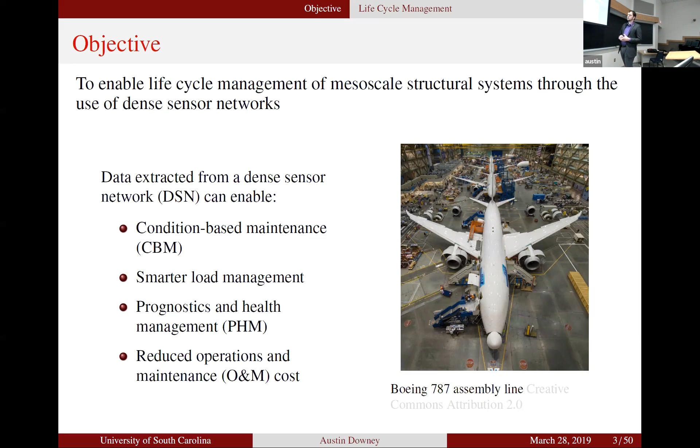This can enable condition-based maintenance, smarter load management, so we can take our structures and use them how would be best suited for the structure's health, prognostics and health management, but most importantly, reduced operations and maintenance costs. A lot of this is being pitched towards the view of owners and operators of structures, and if we're not able to reduce their operations and maintenance costs, then there's really no interest in this.

So with all that in mind, what do we need in an ideal dense sensor network? First and foremost, it needs to be cost effective. We cannot take a structure like the Charley Western Bridge here in Northeast Iowa and try to sell them a $1 million monitoring scheme. So these need to be cost effective for the situations we're looking at.

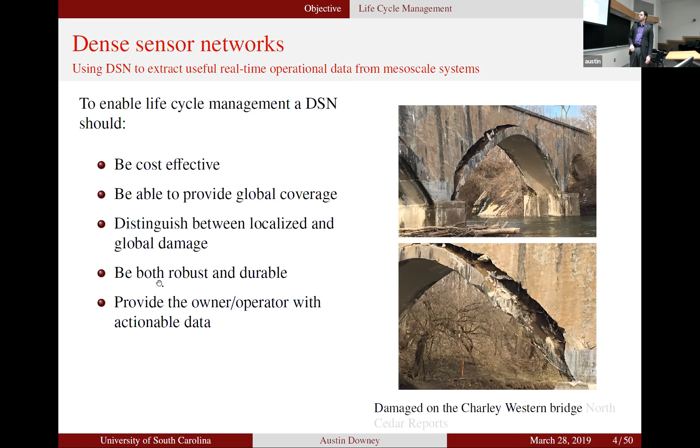It needs to be able to provide global coverage, but also needs to be able to distinguish localized from global damage. It needs to be both robust and durable in terms of how long the sensor can last and what kind of operations it can last through, and provide the owner operator with actionable data. Again, this bottom one is probably the most important. If we're not giving the owners and operators something to do with their data, it's not a lot of use.

So when we talk about actionable data, what does this actually mean in terms of life cycle management? If we start at the bottom left, we have a structural component and some real-time operation monitoring. This dense sensor network is what we're interested in today, shown in this top blue box. There's two sensing technologies here, but there could be millions more.

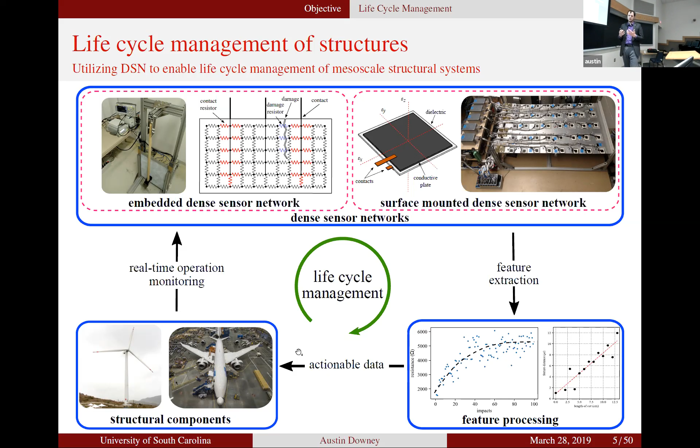Typically from dense sensor networks, we'll look at feature extraction, get us down to feature processing, some prognostics, some condition-based maintenance. But all of this has to cycle back into giving owners and operators some sort of actionable data, something they can actually use to reduce their operations and maintenance costs.

How does this fit into what we typically consider maintenance schemes? In terms of complexity on our vertical axis and benefits on the horizontal axis, we can start with breakdown maintenance in the bottom left corner - we just repair things when they're broken. The next step up is scheduled maintenance, so airplanes have components that have to be inspected every 3,000 hours or 500 hours of flight for engine components.

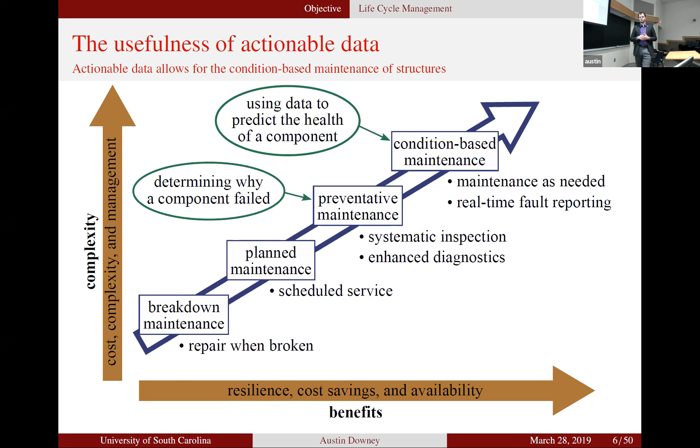Beyond that, we can start to do some preventative maintenance. This is when you start to look at NDE techniques - determining how a component failed, why it failed, trying to see if that component needs to be replaced. But what we really want to push is condition-based maintenance, and to get there we need information looking forward into the future. For this, we really need real-time fault reporting, and this is where the idea of dense sensor networks comes in.

This is the last slide I have on this need for actionable data, and I took this picture myself. This is a wind turbine blade south of Kotzebue, Alaska - that's 33 miles north of the Arctic Circle. There's damage on this blade, and we know where the damage is.

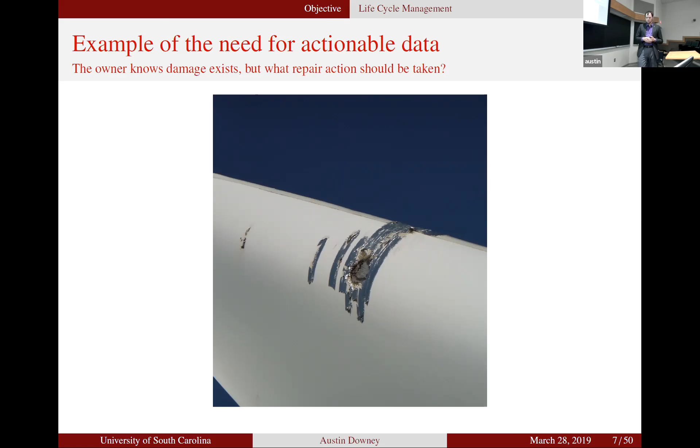Typically we're trying to look at damage location and quantification - we know relatively how big this damage is. That blade operator had repaired that damage once, and then the repair failed. What they were looking for was some sort of actionable data - someone who would come in and give them information about how this blade was going to act into the future. So what we're trying to develop are sensing technologies that can track the degradation and give us prognostics into the future.

So now that we have an idea of why it is that we're working on things, we can look at some technologies. First we'll talk about an SEC-based sensing skin.

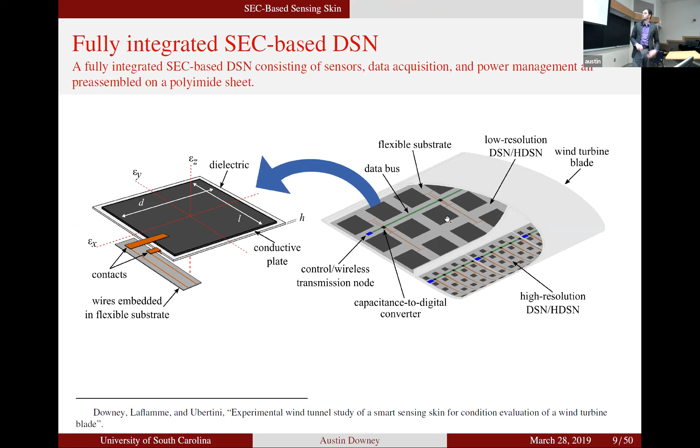This is a fully integrated sensing skin. It comprises small individual sensors that we manufacture, and our goal is to integrate these into large sheets that have all of your controls, wireless communication, power - everything integrated into a whole sheet. Our goal would be a solid polyimide sheet that you could roll up, either as an OEM application or for maintenance, pop off the end of a tube, put some epoxy on a structure, roll out one large sheet, and you're done - walk away.

So a little bit more about the actual sensor. This here is the SEC, the soft elastomeric capacitor.

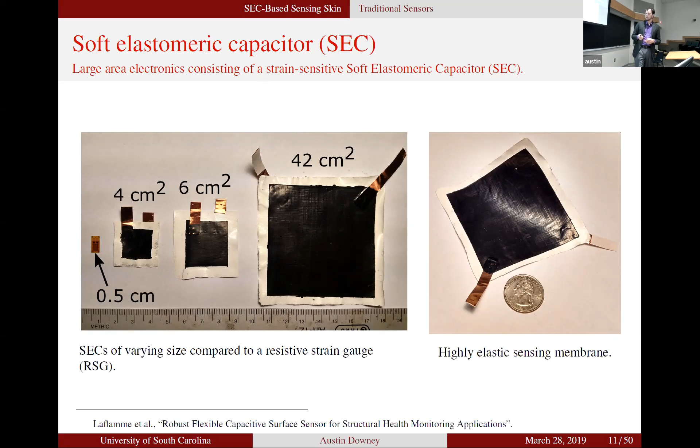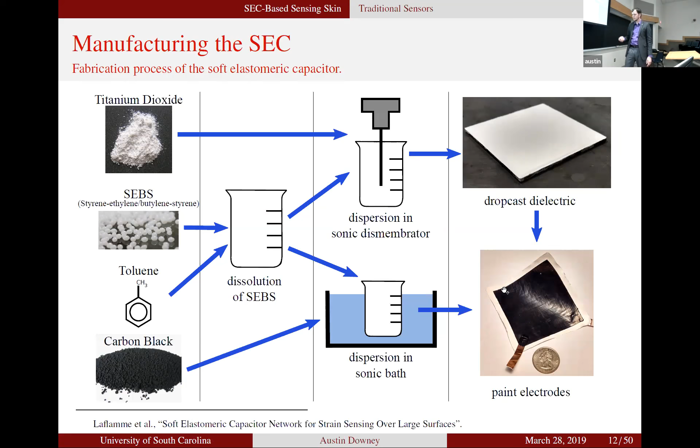These can be made in any size. They're cheap and flexible, made using simple equipment. It's just a dielectric that we drop cast, and then we paint a conductive layer on each side. That conductive layer on each side forms a capacitor with a very simple electromechanical model.

We can get a change in capacitance as a function of our relative static permittivity and the dielectric constant, multiplied by the area over the height. A change in area and a change in height when we stretch the capacitor will give us a change in capacitance. It's an additive strain, epsilon x plus epsilon y, with a gauge factor of about 2.

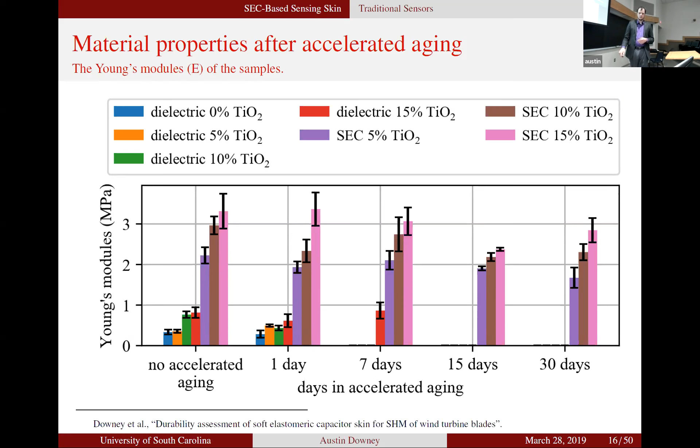And then the Young's modulus - any of the actual SECs, which are the 3 that made it all the way out to 30 days, have a very long, stable lifetime. This is helpful in giving us information on how long these are going to last in the field, so on the order of years is without an issue.

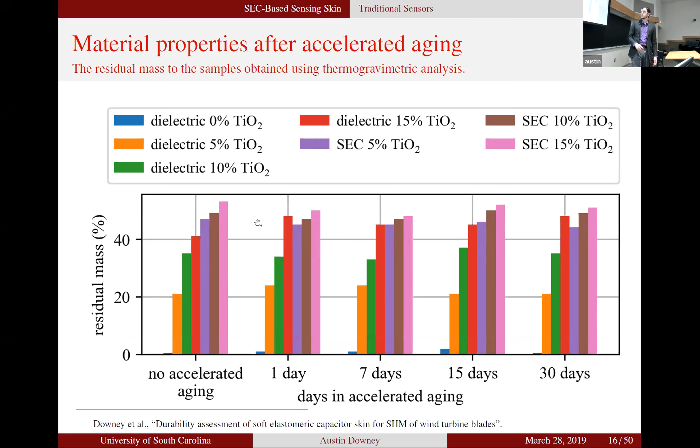Sensor works just fine for that. What if we're interested in a more complex cracking situation where we don't know where the cracks are going to form? We can solve this with the use of a dense sensor network.

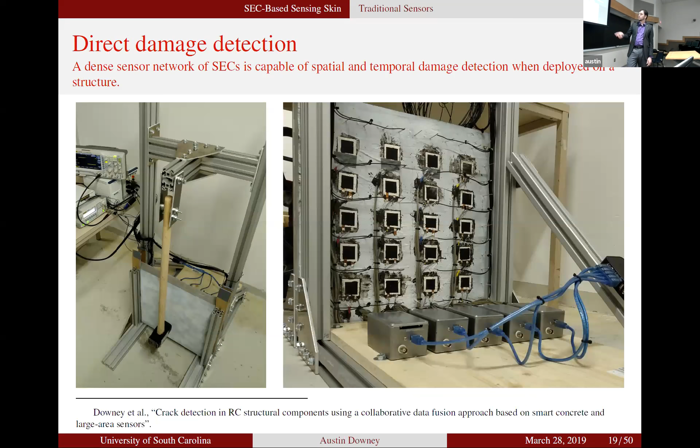This was again at the University of Perugia, on the back of a concrete plate, and we've got 20 SECs on the back. When we impact it with the hammer, which just kind of repetitively falls into the concrete plate, anytime a crack goes through an SEC, we're able to detect it quite clearly.

However, when we have cracks that form around SECs, which you can see happens quite readily here, we have more challenges. This would have to be solved through a model-based approach, looking at actual strain maps.

But the other interesting thing is we can make these SECs in any shape we want, and they're incredibly elastic. Here we have 3 SECs on a steel wire reinforced concrete beam, and you can see that as the beam opens, we get a lot of opening here. We can track all 3 displacements from 3 different SECs, 1, 2, and 3.

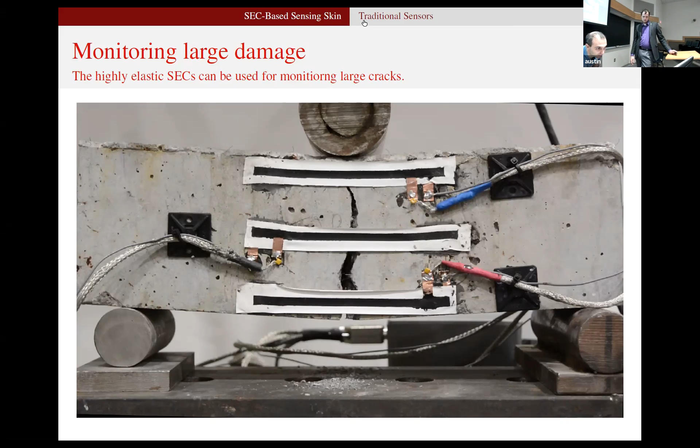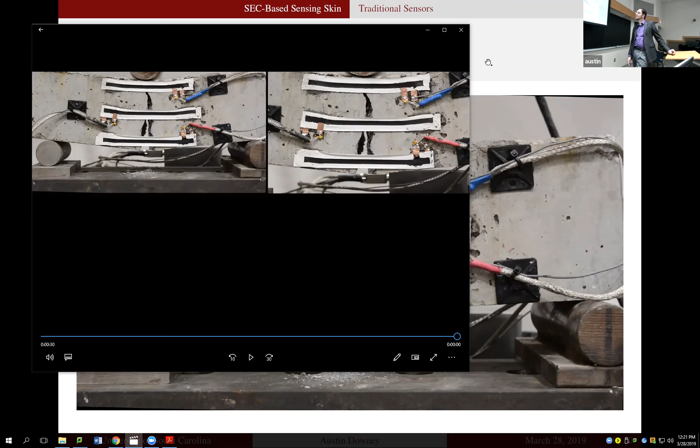Oh, you don't see it? You only see your— sorry. Oh yeah, let's do that again, sorry. Do we have to do that for every video? No, sorry, we're gonna just do your whole desktop. Well, we can watch it again. It's super exciting, nobody got to see it. It's riveting. It's okay, try it again. Okay. You see it now, Tommy? Still don't see it, I'm sorry. It's fine, stop the share. We can tilt the camera around. We should share your screen. Okay, yeah. Try it again, okay, so should I close out of it and open it? No, you're okay, is it working? I'm gonna double check, sorry.

Just continue. So if you can see the video, what you'll see is we have these 3 SECs mounted on the beam itself, and as the beam opens, we can track the opening using each one. These are highly elastic, and this gives us a flexibility that other sensors don't, because we can use this over large openings and cracks, around corners, around welds, and the flexibility allows us to install them anywhere.

So another thing that we can do that other sensors have issues with is full field strain measurements. Of course you could do this with digital image correlation, but that's hard in a monitoring situation.

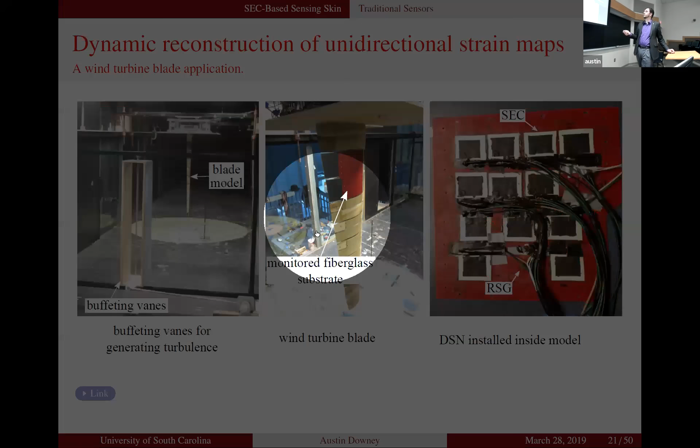At Iowa State University, we have a wind tunnel. What we did is we built a model wind turbine blade and introduced some buffeting to it. We have this fiberglass substrate on the side, and inside of that we put 12 SECs, right, much smaller SECs, but still the same thing.

Here's the wind in real time, this is the blade operating in real time. Other videos, there it goes. Here's the wind blade kind of buffeting back and forth in real time.

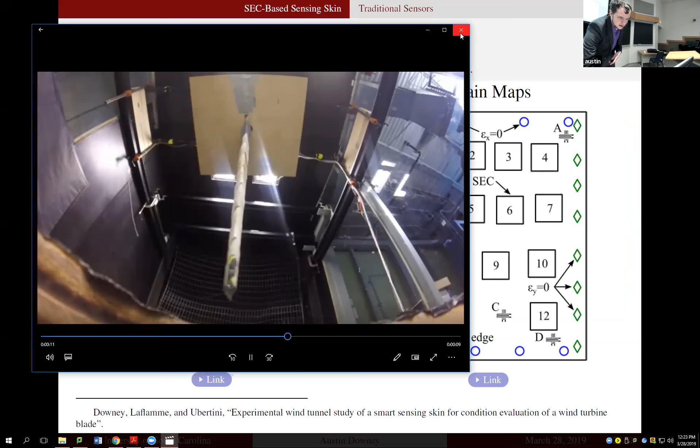Then what we can do is take our SEC measurements and rebuild dynamic strain maps. So here we are slowed down, and we have epsilon x and epsilon y. Again, we measure the additive of the two, and we use an algorithm we developed as part of my PhD to decompose them, but we haven't really discussed that here.

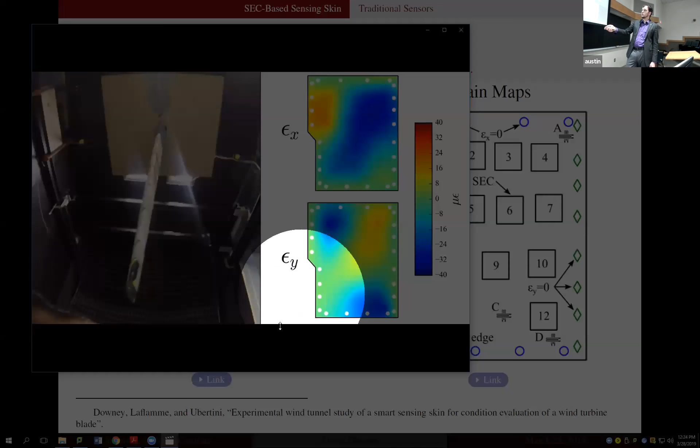What you'll notice from the x and the y is you get tension and compression right next to each other, and this shows that the turbine blade actually has a moment, a torque in it. You can see that twisting in the tip of the blade if you watch—you can see the tip of the blade twisting, and the SECs are able to pick up that torsion in the blade through a full field strain map.

So they work real well for large scale structures, for monitoring very easy to detect cracks. But again, we're interested in developing these for life cycle management. To do that, we really need to get some prognostics data. So what about the smaller cracks?

Here we're going to develop, or talk about, an algorithm we developed for incipient damage detection. Why focus on incipient damage? Direct monitoring of cracks is relatively easy—we put a few sensors down, we have a crack, it forms, we're good. Indirect monitoring of internal damage is definitely more challenging—it's undetectable through traditional threshold algorithms, since we're not just going to see a clear step in incipient damage. There are better prognostic capabilities if early stage damage is tracked, so we can understand how this damage is going to grow the sooner we track it.

Some of the things we really want to be able to do are localize damage within the sensing skin, and we want to do this without a black box algorithm. Nothing wrong with deep neural networks, but we want something physics-based that we can give to an owner or operator, saying this is how we see it, this is why we see it, and it helps them believe it. It's all about getting actionable data back to them, instead of giving them a black box and saying the machine has shown us we need to do this, and the follow-up question is always answered with, I don't know how, but it did.

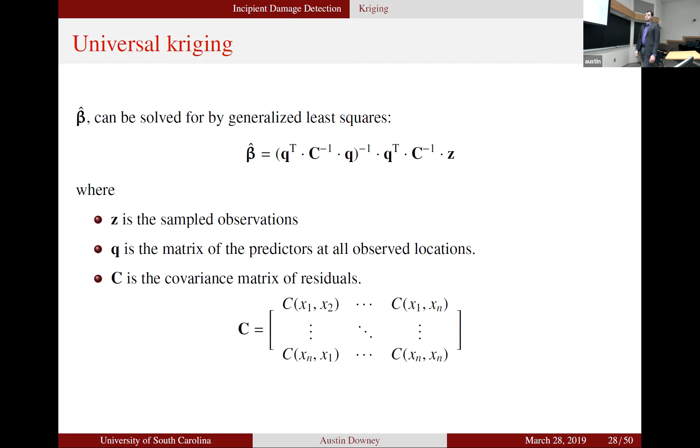So beta can be solved for using generalized least squares, but for this beta we need our C, our covariance matrix, which is a matrix of residuals. This is not a matrix that we have, it's not a matrix we can measure - it's a matrix we have to build.

To build this, we use a variogram model, and we chose a power variogram model just because it's asymptotic, easy to model, and very stable. The important thing to notice is that it's piecewise - if the distance between the data point we have and the data point we want to estimate is 0, meaning we're right on top of the data point we know, our covariance is 0.

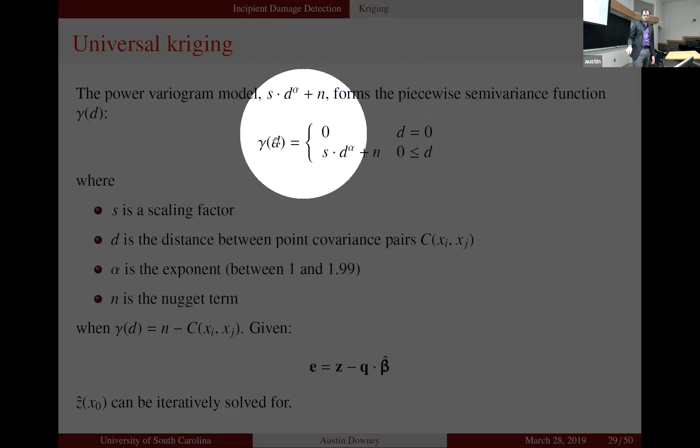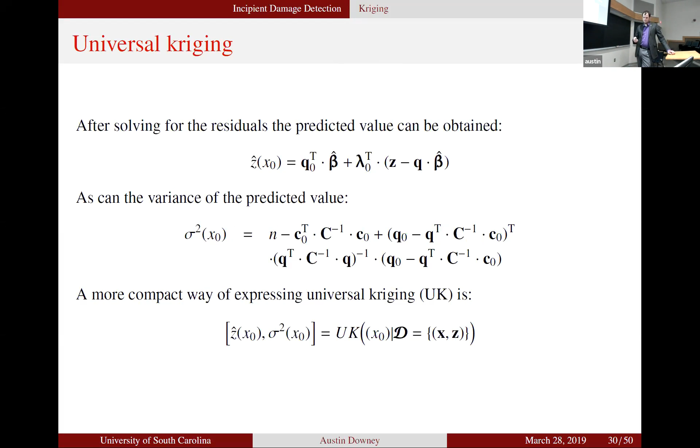And this gives us an exact solution. Anything where our distance is greater than zero, we start to use this power distribution equation. This gives us two equations now. For each value in the field, we have an estimated value at our location Z, and an error value at our location Z, or our standard deviation. We can use these in an algorithm as we move forward. It's a more compact way to write it, but it doesn't matter too much.

We need a variogram model, and so here we use the power variogram model. We also need a drift term equation, and we just use the linear drift for simplicity and ease of code.

Now we want to look at how we can start to use this algorithm to extract more information from our system. Again, we're not able to actually see the damage in terms of signal, so we have to use a statistics-based approach. For that, we're going to use a Kullback-Leibler divergence, which is the measure of dissimilarity between two probabilities. So we have a probability P and a probability Q.

We're going to take the convolution of the two, and then take the area under our convolution curves. This gives us a quantifiable dissimilarity between two probabilities. This has been used before for incipient fault detection, so it's a good place to start. It's computationally simple, except for when we have this in a continuous integral, which is very difficult to do.

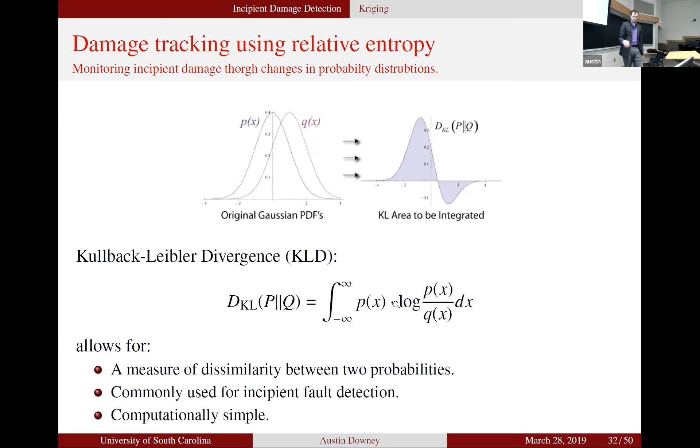But we can recall that kriging gives us our mu and our standard deviation for each value. So if we put these into normal distributions, we now have a very simple mathematical expression that we can get for our dissimilarity. All we need to know is our average value, our mean value, and our standard deviation for our two probabilities. And that's very easy to obtain.

So now that we have some information on how kriging works and how Kullback-Leibler divergence works, we can build a very simple algorithm that's very easy and very quick computationally to solve.

On the top left, we're going to collect our SEC signals. Here we have 100 sensors on a cantilever beam, and we'll show that in a little bit. Geometry fusion, which is another algorithm we developed, isn't needed, but is a way to get better accuracy strain maps. Then we're going to develop a full field map of P, which is just what we get from our SEC data. We get one map for our entire sensing skin.

And then we're going to develop N full field maps of Q, and Q is our other probability. Since we have 100 sensors, we're going to get 100 maps, where each map is the spatial map with one sensor removed. We can do our Kullback-Leibler divergence between the two maps then.

We end up with 100 different KLDs, and we just stack them on top of each other, take the L1 norm, and then we end up with a spatial damage index. So if we want to simulate this real quick on a computational model, we've got a cantilever concrete beam here that's loaded to the tip, and we have 3 damage cases.

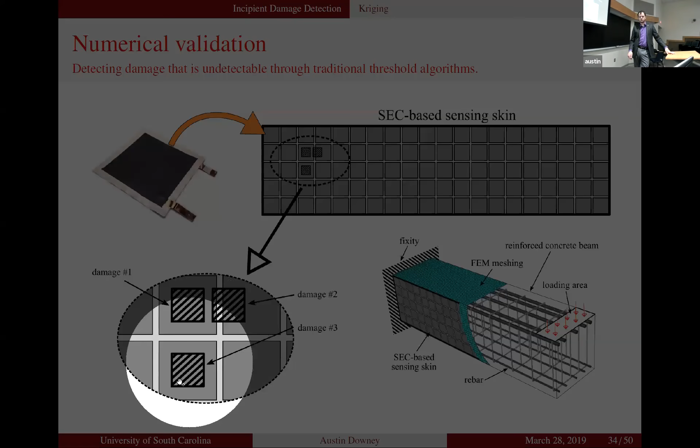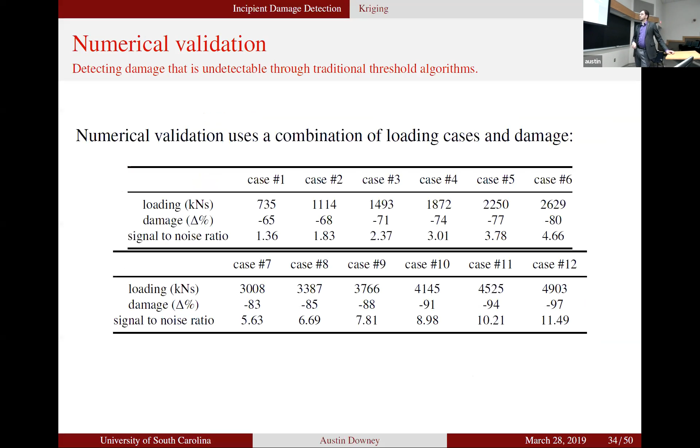Damage case 1 was selected to be in the middle of an SEC, kind of in an area of high strain. Damage case 2 was selected to be in between 2 SECs to see how well that would work. And then damage case 3 was selected to be towards the center line of the beam where the strain would be a little bit lower. The neutral axis was a little bit farther down, but it's relatively close. So just some different test cases of increasing damage.

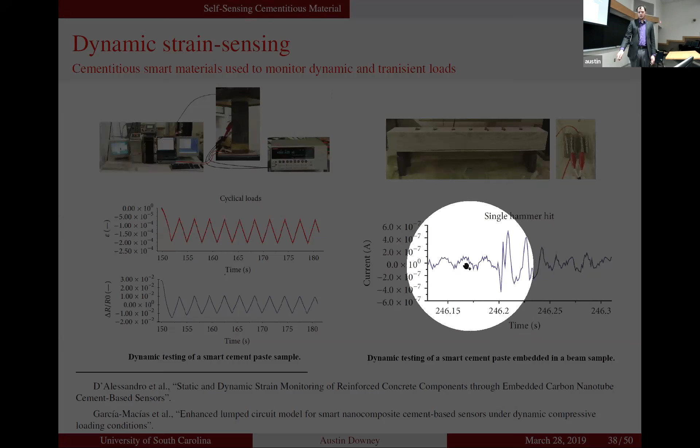We can do the same thing with transient damage. So here we have a beam. We cast this beam in the summer of 2017. And then here, about 8 months later, we did a transient load once the concrete had dried. You impact it with the hammer, and you can detect the vibrations in the beam with the concrete sample itself embedded in.

While those are actually very interesting, I'm interested in long-term monitoring. So how do we develop this for a long-term approach?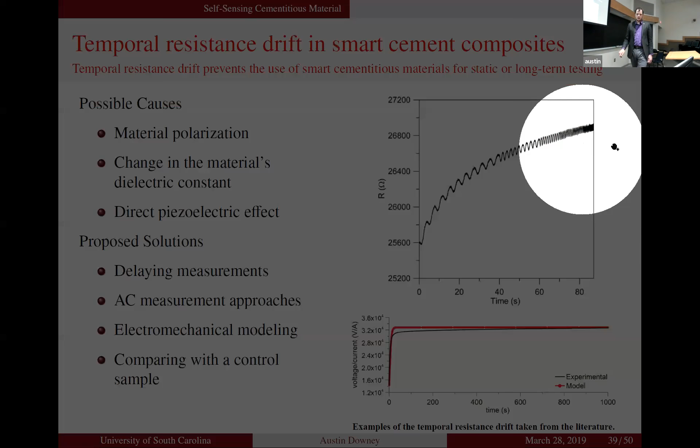There's been some expertise with trying to model this. Some people have had more luck than others. Proposed solutions to get around this drift have been delaying measurements, AC measurement approaches which can and can't work, but also make multi-point samples hard and are much more expensive.

Electromechanical modeling, which is a good attempt certainly, and then just comparing it to a control sample. So you have a control sample and another sample, but what happens if you have an issue with your control sample, or your control sample comes out of phase?

So as a simple way to alleviate this issue, we hooked up a biphasic DC function generator and created a biphasic DC signal, and then developed a measurement approach around that. We're going to continuously charge and discharge this material, both positive and negative.

Our first attempt at solving this was to develop a resistor mesh model. This is just a model of resistors that we solve for numerically. We do this in SPICE, which is an open source circuit simulator from Berkeley, and we can do this repetitively to solve for a solution.

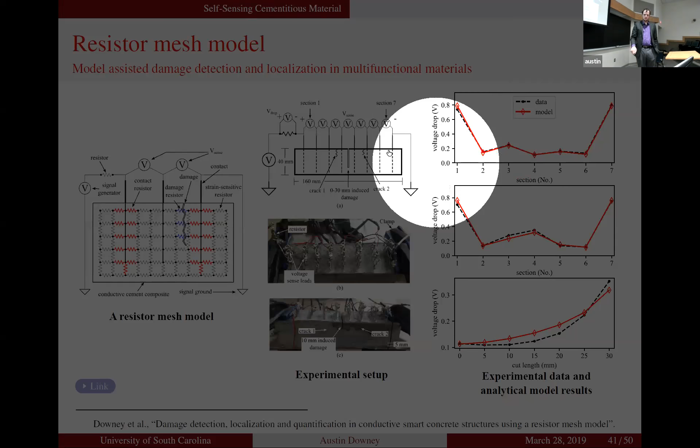The data line is what we get with what we're actually measuring. And then by adjusting the value of the damage around our cracks, we have 2 cracks here, 1 and 2, we can adjust our model to match that pretty well.

So here we have adding crack depths to it, and with the increase in crack depth, we're just sawing through it, and our model is able to track it. And that video is not going to work. Okay.

But then we wanted a much larger beam. So here we have a much larger beam, and this whole beam is filled with multi-walled carbon nanotubes. It's simply supported, and then we're going to apply a load down the center.

What we get is we can track the strain throughout the beam at different sections, and we can track that quite well. Then at an applied load of about 1.7 kilonewtons, we have an audible crack that forms in the beam, and this drop here is a functionality of that crack opening.

This crack was already there. It was a surface crack, and inside the beam, that crack actually opened up a little bit more. But there's no real way to see it visually on the surface. We can model this internally, and we can get a model that matches this data quite well, and it helps reinforce the idea that we can track damage.

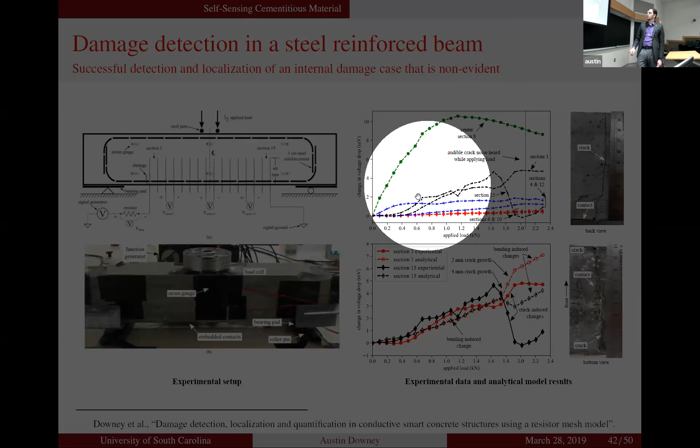But these were done, sorry, it keeps moving, all of this was done by moving these resistors manually and setting resistor values to recreate that crack. But we want to do this automatically.

So we went back and thought about this again, how can we automatically place damage resistors into a mesh? We need a data set that continuously grows, and to do that we took this concrete plate, a 0.5 meter by 0.5 meter concrete plate filled with multi-walled carbon nanotubes, and we repeatedly impacted the plate, again and again and again. Here's our experimental setup, and here's our resistor mesh model.

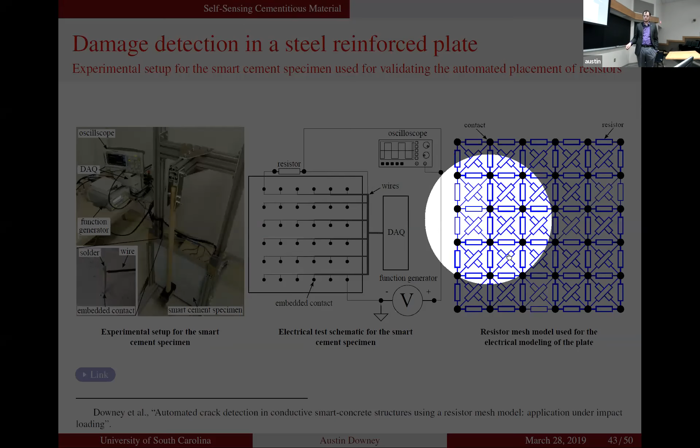So instead of trying to place damaged resistors, we built an automated placement algorithm, and this is just sequential Monte Carlo. It's 11 lines of code, and we start with an initial guess. We try a lot of guesses from a uniform distribution, pick the best one, and drop it down generation after generation.

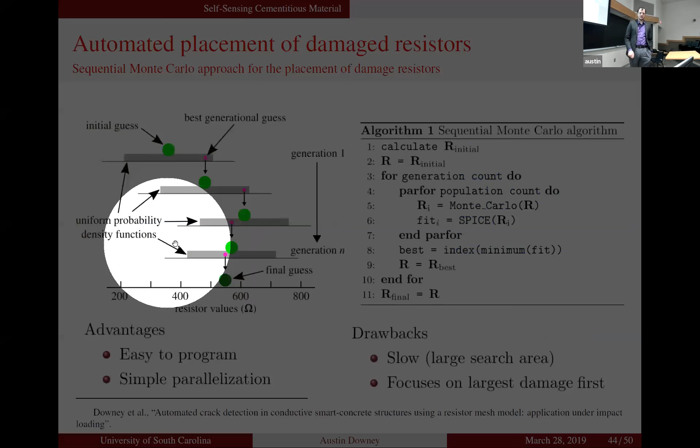The advantages of this is that it's very easy to program and very easy to parallelize. So the code itself runs quickly if you can get it on a machine with lots of cores, which we were able to do at Iowa State.

Some of the drawbacks, though, is it's relatively slow and it has a large search area. It's not very efficient, and it focuses on the largest damage first. So if you have a large damage in your structure, it's going to concentrate all of its ability on that large structure and then slowly move through.

So here we can see the pristine case of our plate. This is what our algorithm gives us in change in resistivity. And then after we impact it, we have 3 spots on the plate where we lost a little bit of concrete, so we lost conductivity here, here, and then on the back. And the benefit of this method is it doesn't matter if it's on the front or the back, it can pick this up. We were able to find these 3 losses of material.

If we subtract one from the other, we get a much clearer look. A challenge of this is that when we have situations where a crack opens and closes, you're not going to see that, because your crack is going to reclose and you're going to gain back a lot of your conductivity. But anywhere where we have spalling or a loss of material, it's pretty easy to see.

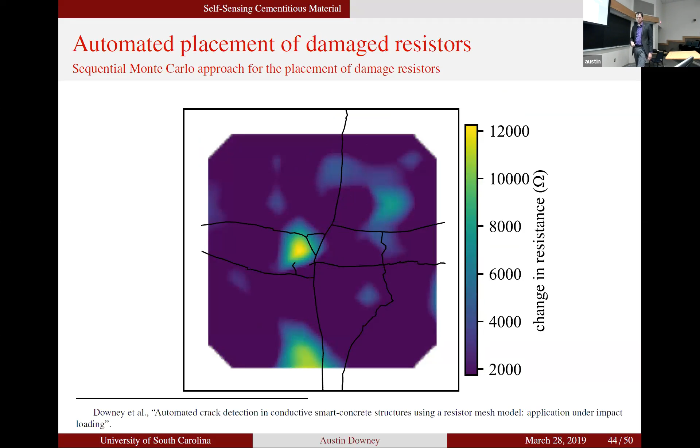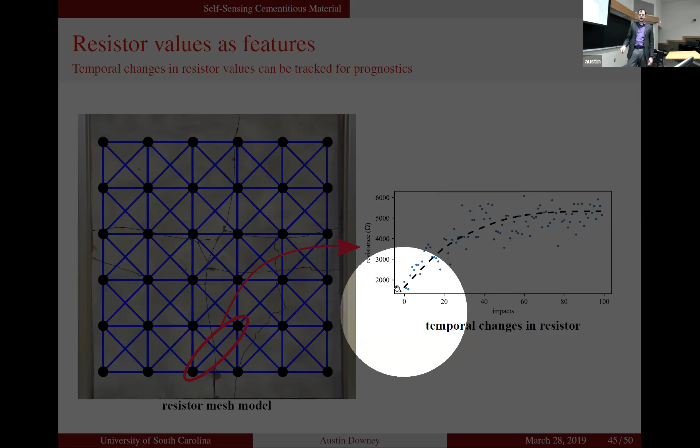We're interested in developing this for prognostic reasons. If we take a single element like this one here that crosses a crack that opens, we can solve this algorithm for each damage point and see an increase till about 50 impacts, then a relatively constant increase in resistance. This actually lines up with what we saw from the experimental data and how that crack opened - it starts to open from 0 to 50, then after that the impacts really didn't do anything.

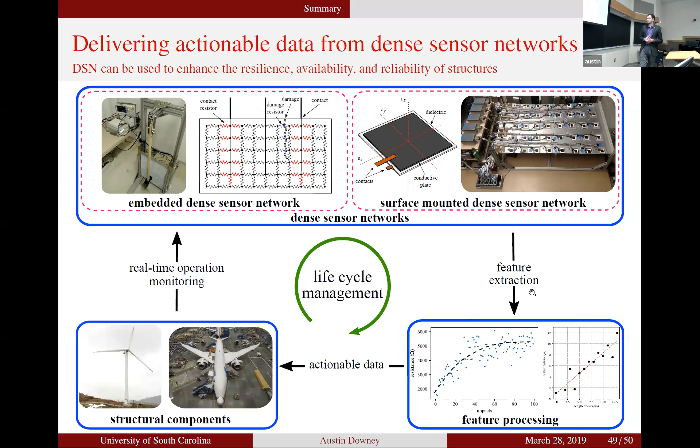So to recap quickly what we did: we're trying to deliver actionable data from dense sensor networks, and we're developing the methodologies and technologies to get us there. The only 2 things we talked about today are these 2 sensing technologies, but at the University of South Carolina we're focusing much more on feature processing and prognostics. Some key developments: we implemented a highly scalable SEC-based dense sensor network, developed an incipient damage detection algorithm for the SEC-based dense sensor network, developed a deployable self-sensing cementitious material, and devised a model-assisted damage detection technique for that material.

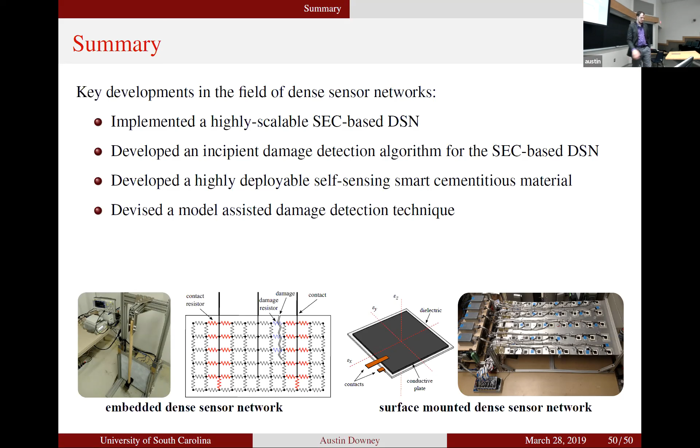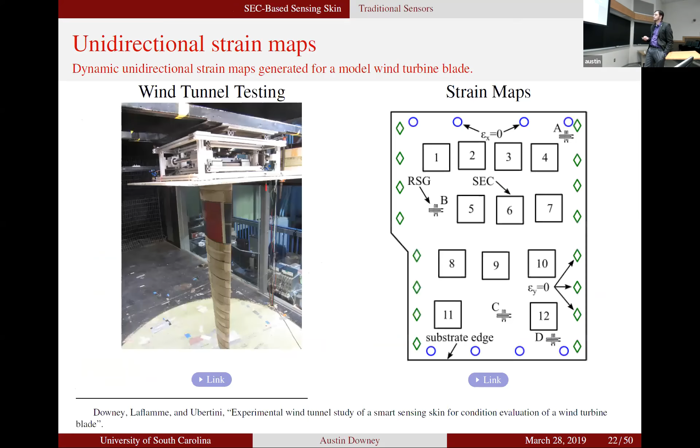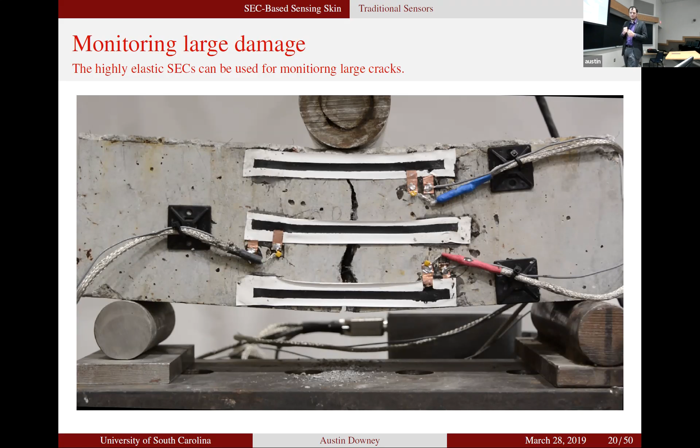Yes, let's go back to that because that's actually an interesting question. This is probably the one we're discussing: if we glue the sensors directly, completely under, right? So right now it's glued on the edges. If we glue it completely under, we're actually not monitoring the expansion of that joint, we're monitoring cracks in the glue. When these cracks get quite big, sometimes the glue will stick over a gap, and we're trying to get nice, clean measurement signals. For smaller measurements, gluing it all the way across is definitely more advantageous because we'll start to get every small variation. But when you want nice, long, clean signals, that's more like an LVDT, and gluing on the edges is a much more appropriate response. So for smaller cracks, gluing completely tends to help. For these larger cracks, gluing completely will get you lots of ripples that are just a function of the glue cracking, not so much the actual expansion of the joint. So it definitely needs some more investigation.

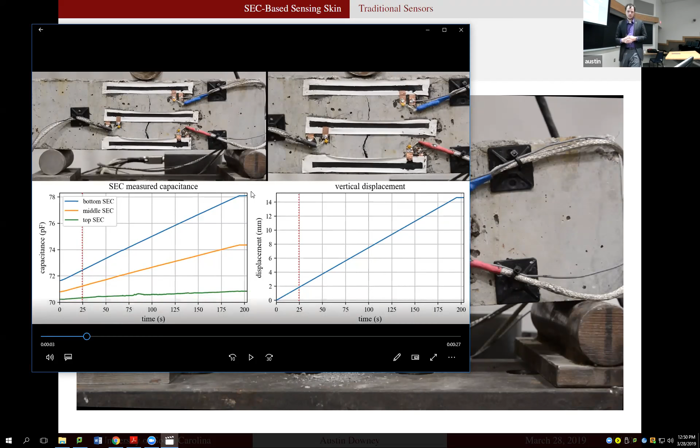And following up on that, regarding the fatigue application, is there a way to distinguish between big cracks that don't need repair and small cracks that do need repair? A sensing technology is just going to give you information about the crack itself. That follow-up needs to be done in either some sort of model updating scheme, or with a qualified engineer or technician, the same way we monitor for fatigue cracks now in a structure. But all structures have damage, it's how much you're willing to accept.

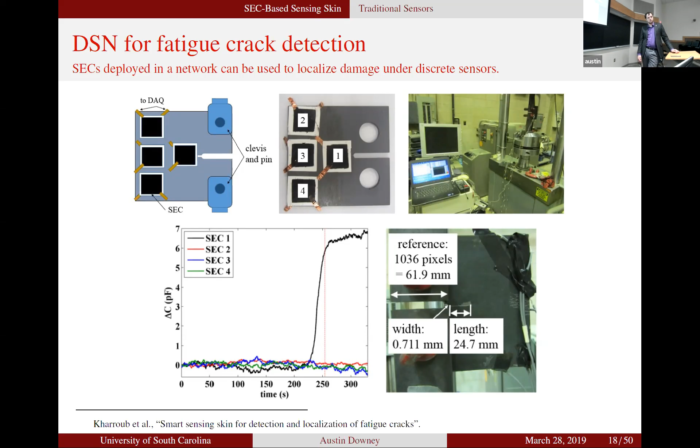The error, does it come from the damage to the sensor itself or the damage from the structure? Because from the reading, for example, for this one you have a jump, but if you damage the sensor, you may also have a jump in the reading. So how do you differentiate that?

Correct. So you're probably looking at this, right? How do you know if this is damage to the sensor or damage to the structure? You would have to go out and look at your sensors. But that's simple, I mean, that's true for anything, right?

If I take a notch out of a fiber optic strand, how do I know? Well, it probably wouldn't even last if I took a notch out of it. But it's a certain challenge. The way to look at durability is that if something happens to your sensor, you can still use that sensor as long as you know what happened to it, or you have a new baseline.

It also helps with installation. It makes it easy to install because all you have to do is glue and pre-stretch. And if you don't get it exactly right, it doesn't matter because it's your baseline that you're measuring off of.

Kind of along the same as the last question, right? You only start obtaining data from when you place a sensor on. You don't have any information about what happened before, although that's the information we really want.

But that damage doesn't affect your result, right? You can still obtain the structural damage. Yes. So like on these damages here, at 240 seconds, if there was a fatigue crack that opened in between, we'd see a signal.

You're not going to be able to tell the difference between the two unless you know there wasn't somebody out there cutting it.